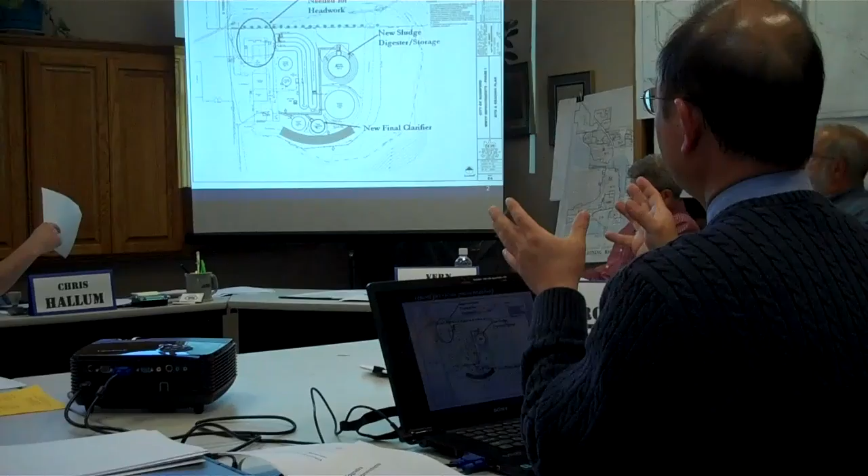Wastewater from the cities and the villages receive. This is at the beginning of the treatment plant where all the sand and grit and the rags are removed.

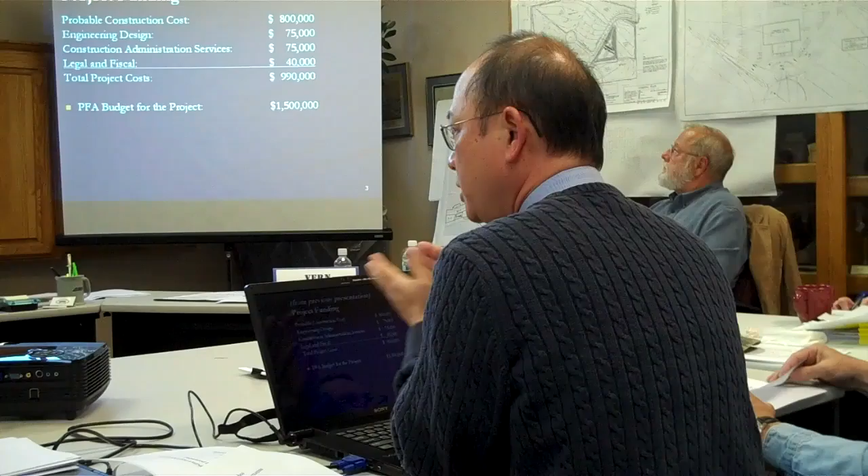We also talk about the total project that was presented to you a month ago. It will cost roughly about $1 million. Minnesota Public Facilities Authority, the funding agency, has reserved $1.5 million of low interest rate loan for you. But I also mentioned that the city currently has more than $1 million of reserve in the sewer fund, and still continues to set aside money toward the sewer fund that could be used to partially fund this project. Again, we are at a time where the state agency is giving out this record low interest rate to communities doing public infrastructure work. The last that I heard, interest that you could possibly get is less than 2%.

So when the time gets closer, I'll come back and talk about the funding options. Is it better for the city to invest your reserve fund in something with a high yield interest, or to add some of the reserve fund toward the project and reduce the amount of the loan?

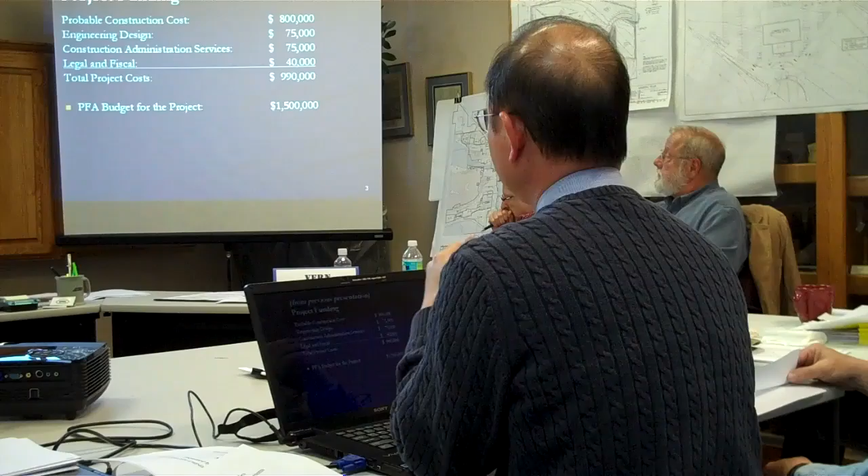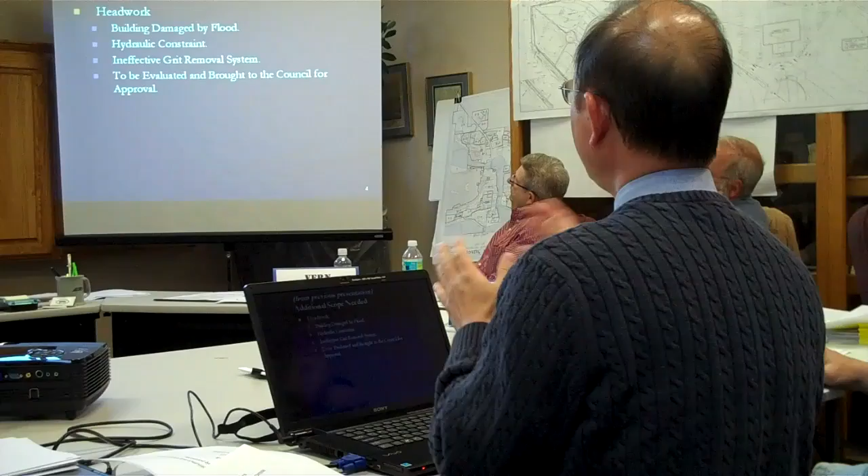Again, in that presentation, I also mentioned there's some additional work needed out there that we will evaluate with your staff and come back with recommendations for your approval. Tonight I will talk about what needs to be improved at Headworks, but we're not asking for council's approval yet, recognizing that after the council meeting your public works director will provide a guided tour, and there will be a lot of questions asked, so we encourage the council to get familiar with these important infrastructures that need a lot of help, and ask questions at that time.

But basically, this building was damaged by the flood, and there are some hydraulic constraints that need to be resolved. The grit removal system, in talking with your public works director, we have decided not to recommend it to the city at this time. Not because it doesn't need it, but because it is not critical at this time yet.

It's going to cost a lot of money to add a new grit removal system, and I understand that the community is looking at conserving your fund. Excuse me, I got a question.

Sure. What is hydraulic constraint? That's a very good question. Hydraulic means water. The wastewater comes in, water flows downhill, and when you get to the treatment plant, it's about 10 feet below grade. You need a pump, hydraulic machines to pump it up to the head of the treatment plant, so it can continue to flow by gravity through the entire treatment plant out to the receiving water. Very good question, thank you.

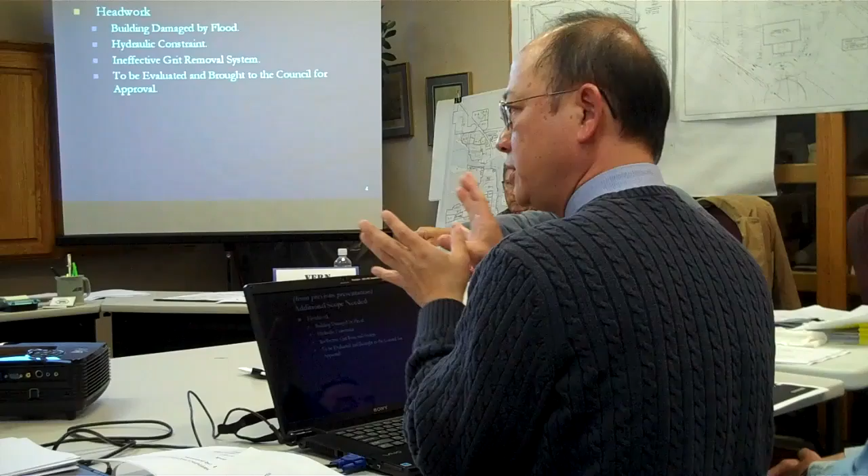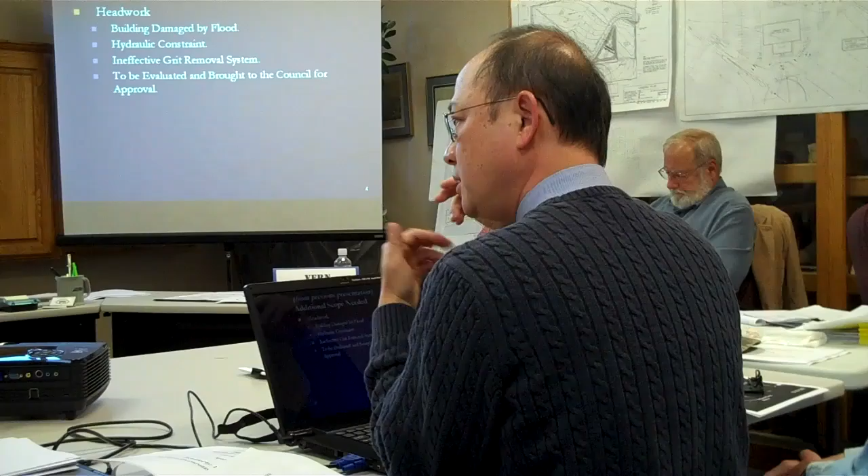Is there anything that the grit removal system isn't making as efficient as it could be? In other words, if you have a lot of grit in the sewage, isn't that going to be a detriment to the operation of the treatment plant? It would, but in this case, the wastewater has to be pumped first anyway before the grit removal. Nowadays, most pumps have impellers made out of a better alloy. So eventually the grit still needs to be removed out of the system, but in terms of damaging the machine and impeller, to some extent it may damage the aerators. If you have excessive amounts of grit running through the aeration system, and the aerator turning at a very high speed, it could potentially damage that.

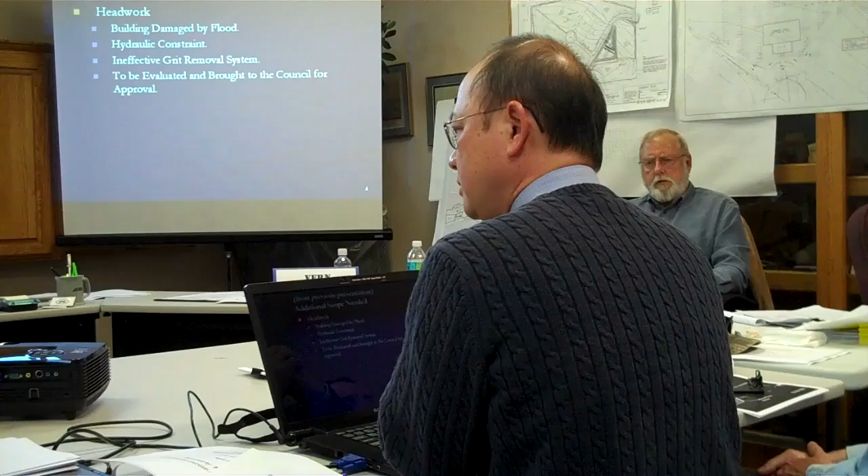A grit removal system is going to cost somewhere around $200,000 by the time we're done. It's a very expensive facility, and your system is getting some removal, meaning that the remaining grit that doesn't get removed ends up in the aeration tank. You have a fairly large aeration tank, so it just means that maybe every 5 to 10 years it needs to be cleaned out. But ideally, eventually you would need a better grit removal system.

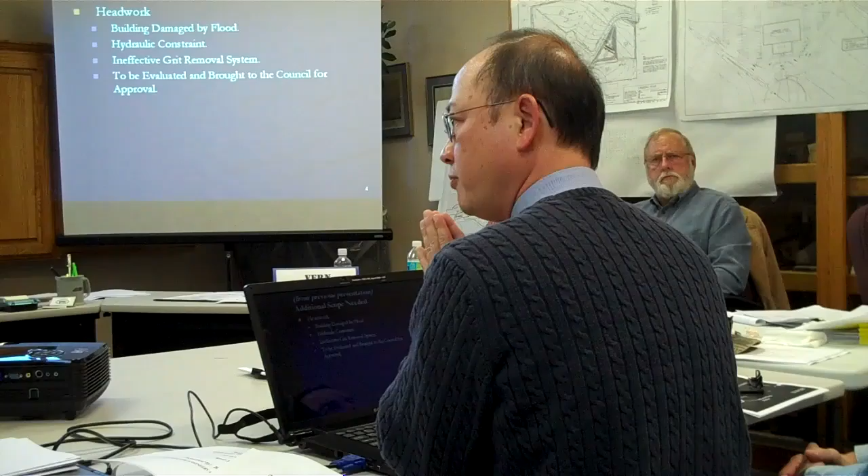What is this grit? Sand and rock and eggshells, coffee grounds, things that come through the collection system to the treatment system. As you build the system here with the contractor, you're going to have less grit coming in, because every 4-foot section of clay pipe that has a gap draws in sand. When you get better pipes, you're not going to have the grit as often. You don't have the siphon effect once you eliminate the seam. Right, okay, get rid of the groundwater.

We're going to be spending a lot of time out there, so I'm not going to take too much of your time to review this. This is the Headworks building. As you can see, this picture was taken on October 29th of 2007, and you can still see the moisture on the wall. This is where the flood level was, and it wasn't completely dried out at the time. It does cause some damage to the building. Here's the screw pump, the influent pump station that Jeff was explaining about.

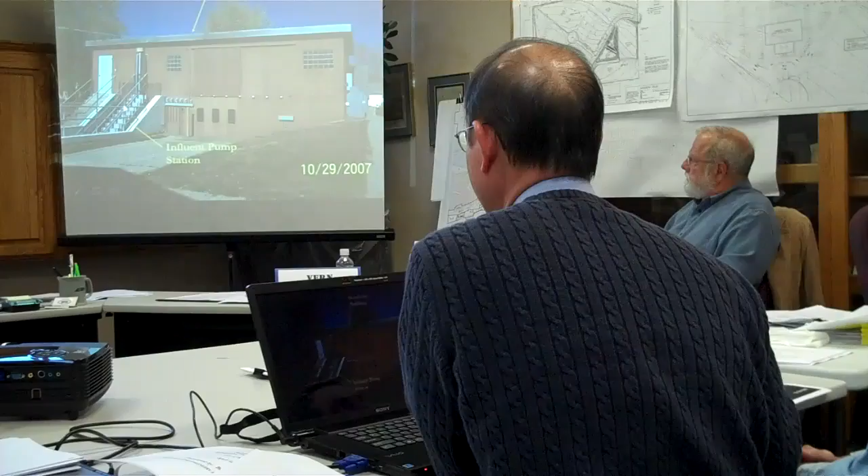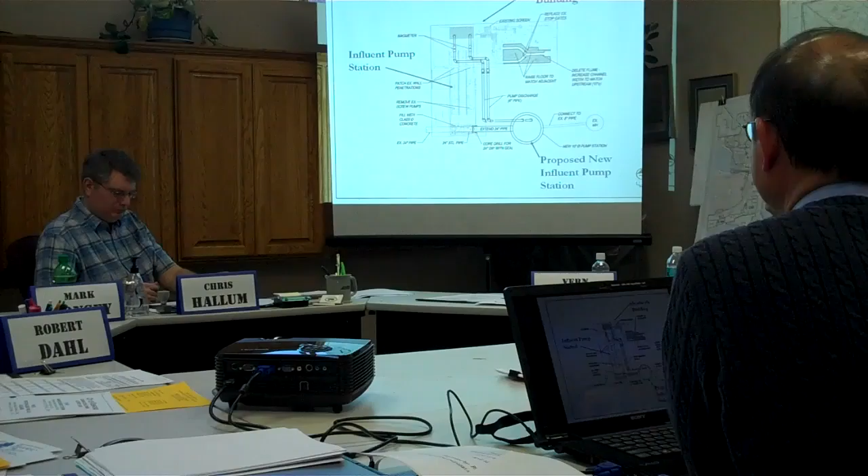When you go down there for the tour, you're going to see there's much more than what you're seeing here. So they're still...